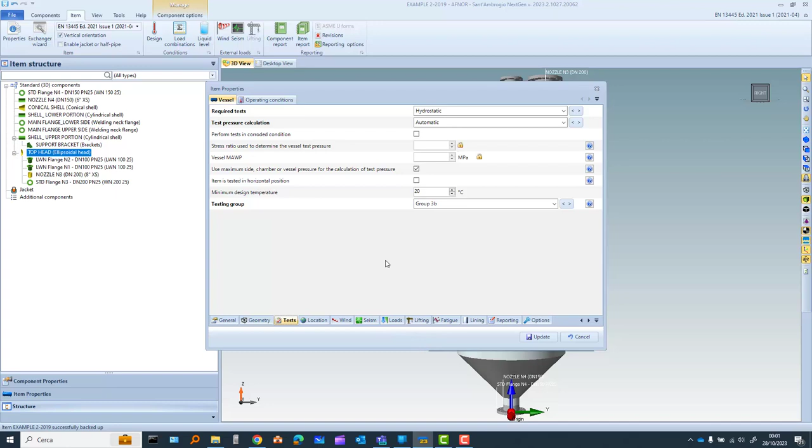Location, wind, seism, loads, lifting, not interesting in our case, but fatigue, of course, is interesting. Number of load conditions: there is only one condition of fluctuation, which is, by the way, pressure-only fluctuation. The pressure range is 17.5 bar, 1.75 megapascal. Why? Because the design pressure, we will see this in operating condition, is 20 bar. Of course, the fluctuation cannot be from 0 to the design pressure, it will be from 0 to the operating pressure.

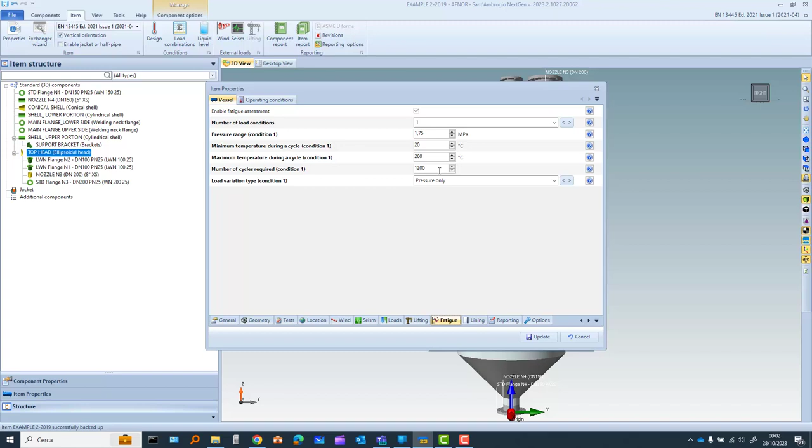Minimum and maximum temperature during the cycle are 20 and 260 degrees. Required number of cycles is 1200. Lining, reporting option, not interesting. Look at the operating conditions.

Design temperature 260, internal pressure 20 bar, we have no external pressure in our case, joint efficiency 0.85, there is no external corrosion allowance, there is only an internal corrosion allowance of 1 millimeter. There is no weld overlay, no cladding, and the class, according to the table contained in part 5, is class 3B.

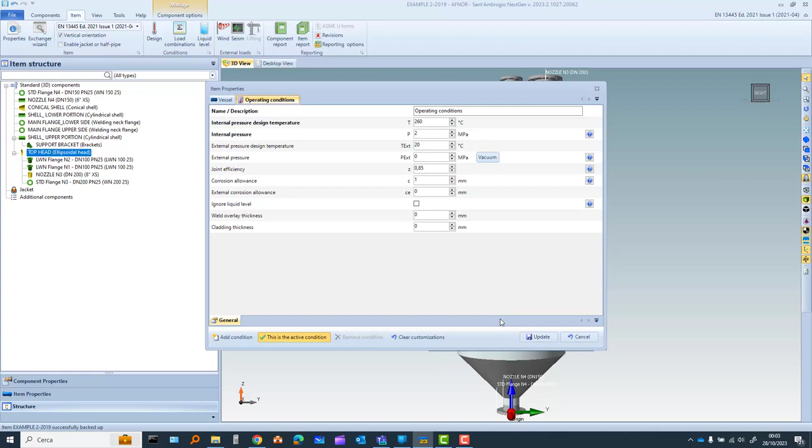Then we close this and we start looking at the various components of this vessel. Let's start with the upper end. The upper end is an elliptical end. The material is carbon steel P355GH EN 10028-2. There is an under tolerance of 1.4 millimeter, which is due to the forming process. The thickness is 14 millimeter. The inside diameter is 1100. The head ratio is 2 to 1, so this is a classical elliptical end.

Under general, what is interesting here is the external diameter multiplier to calculate the head blank diameter before forming. This is important for the calculation of the elongation. The entire vessel belongs to group 3B, as I explained. Let's look at the preliminary report. The minimum required thickness for internal pressure is 9.6. The reason a greater thickness, 14 mm, has been used is because we have to provide adequate reinforcement for the nozzles at the top.

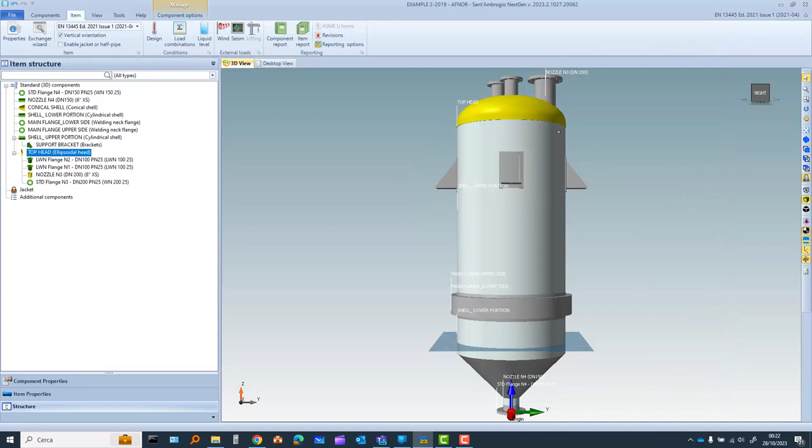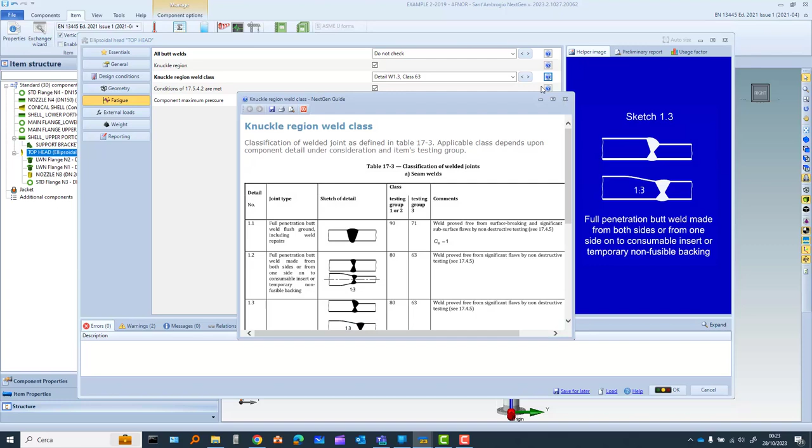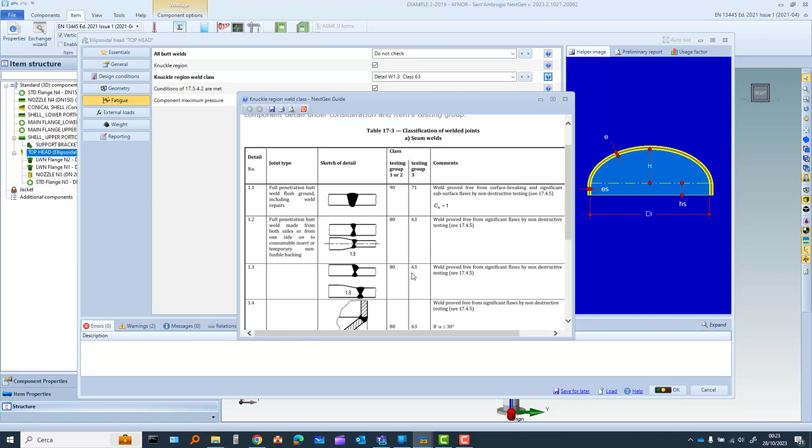Before closing this, let's look also at the problem of fatigue, because this is the most important thing. Butt welds do not check, because there is no governing weld. This is made of one piece only. Knuckle region weld class, this is important. Let's look at this table of the standard. What is applicable here, in the knuckle region, is the weld with the first shell. This is a weld between two different thicknesses. Therefore, for testing group 3, the class is 63. In fact, we have written class 63. Conditions of 17.5.4.2 are met.

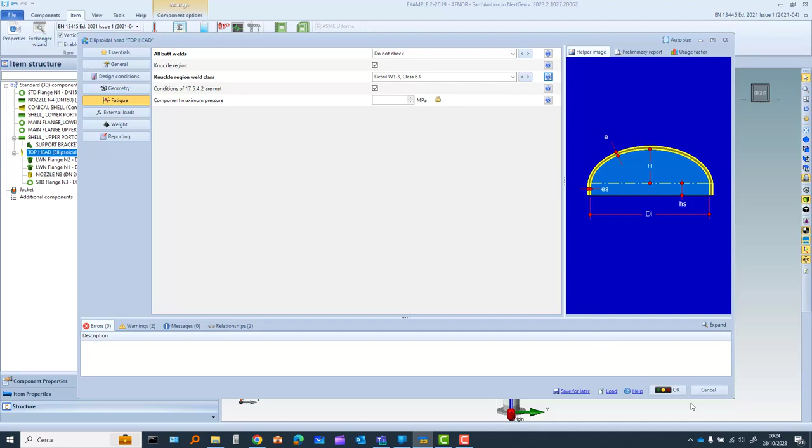What are these conditions? These are the conditions for the calculation of a minimum number of cycles for fatigue greater than 500. This is not important in our case. It could be important if the purpose of this calculation was to see if a calculation for fatigue is applicable or not. But we have started exactly from the idea that we must make this kind of calculation. Then we go to the cylindrical part. The cylindrical part is also made of P355GH.

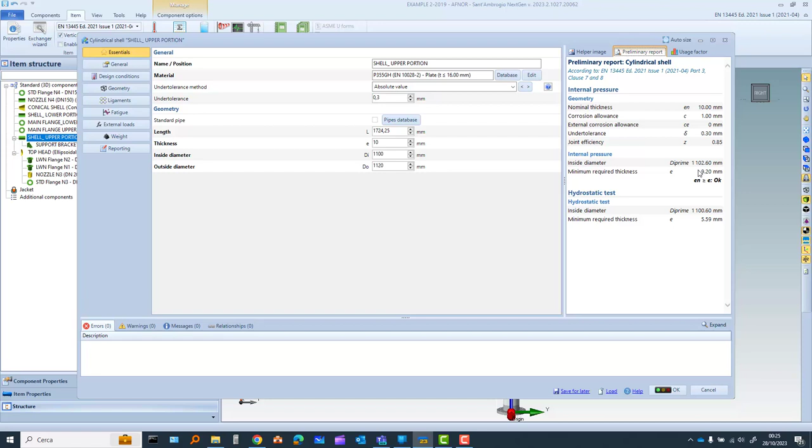The under tolerance method is absolute value, 0.3 millimeter, which is the normal tolerance for this kind of material. This is the length, this is the thickness, 10 millimeter, this is the diameter. Well, of course, we must give a look to the preliminary report. The preliminary report tells us that the minimum thickness for the internal pressure is 9.2 millimeter, so 10 is the correct thickness.

For fatigue, we have to see longitudinal butt weld, general case with combined imperfections. The problem of any weld is the fact that there are imperfections. In the case of a longitudinal weld of a cylinder, the imperfections are of three different types: the offset, the overlay, the ovality, and the peaking. The offset is given by this table, offset of middle lines for longitudinal welds in cylinders.

The cylinder is between 4 and 10 because it's 10, so we have decided to give the maximum allowable values according to the standard. We have 1 millimeter. The ovality, we close this and we look at the ovality. The ovality, the out of roundness, shall be calculated in accordance with the following. It shall not exceed the following values:

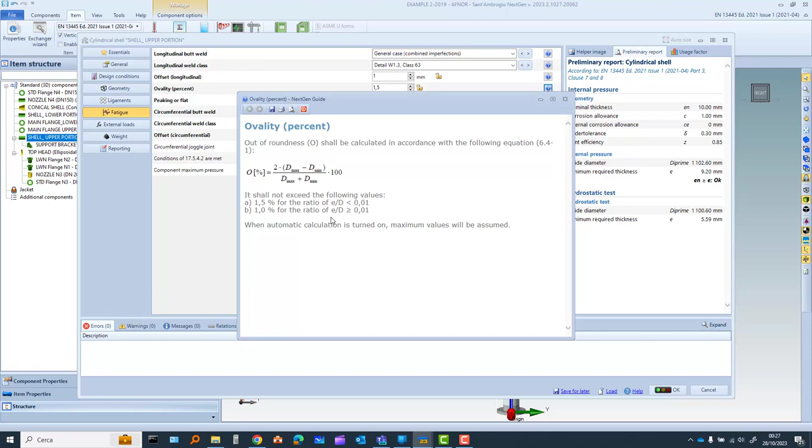1.5% if the ratio thickness over diameter is smaller than 0.01. Otherwise, it's 1%. In our case, the diameter was 1100, the thickness is 10. It is certainly smaller than 0.01.

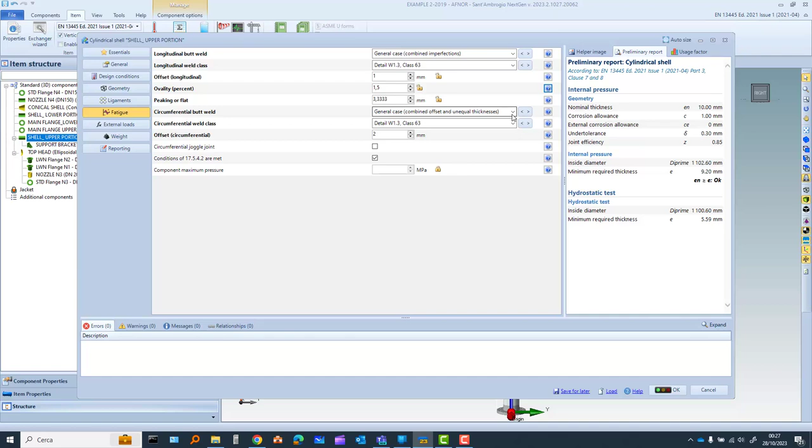Other problem is the peaking. What is the peaking? The peaking is the distance between the top part of the weld and the ideal circle. So any longitudinal weld will cause a small distortion of the edges of the adjoining plates. The maximum allowable peaking for thicknesses greater than 9 millimeter is the lesser of the thickness divided by 3 or 10. Thickness divided by 3 is 3.33. So we have used the maximum possible defects.

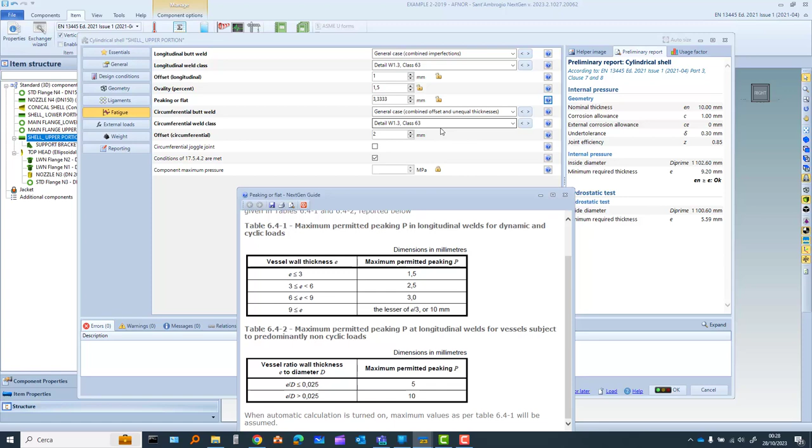Then we have to look at the circumferential butt weld. General case, combined offset and unequal thicknesses, because of course it is connected to other components with different thicknesses. So what is applicable is the same detail that we have already seen for the class 63.

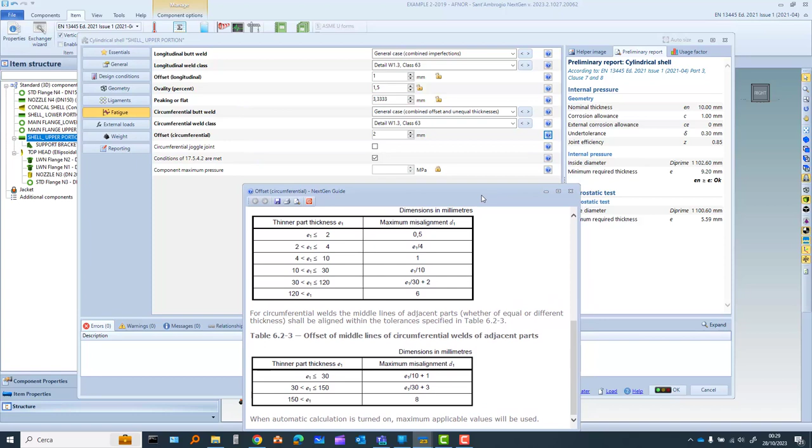Offset circumferential. In the case of circumferential weld, the allowable offset is different. For thicknesses smaller than 30 millimeter, it's 1/10 of the thickness plus 1. 1/10 of the thickness is 1, plus 1 is 2. There are no circumferential joggle joints. Okay, we close this and we go to the next component.

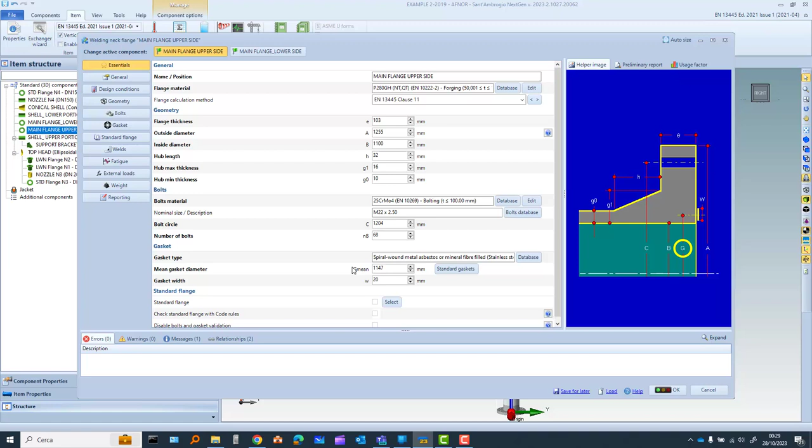Next component is a flange. A flange, well, you have all the data. This is made also of a carbon steel material. Of course, the carbon steel material is the one which is suitable for forgings. Calculation is made according to clause 11 of EN 13445-3. These are all the dimensions. These are the bolts and everything. Let's go directly to see the problem of fatigue.

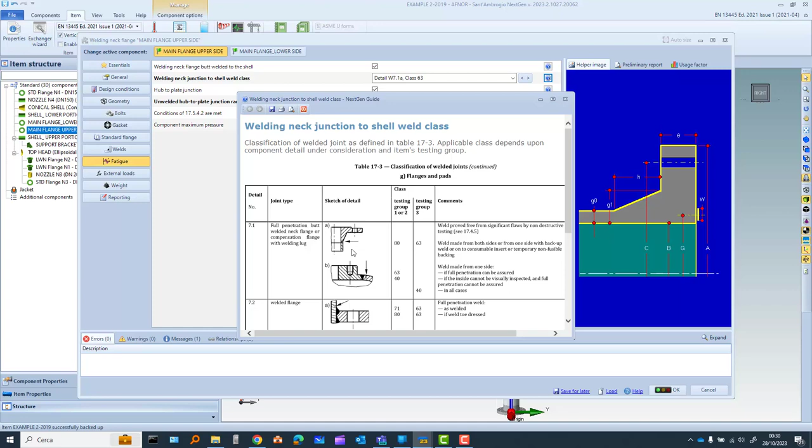Welding neck junction to shell, weld class. This is a circumferential weld. The detail is W7.1a. We are in this condition. Class 63 because the testing group is 3. Then unwelded hub to plate junction radius is this radius, the radius between the plate and the hub. We suppose that the junction is 13 millimeter.

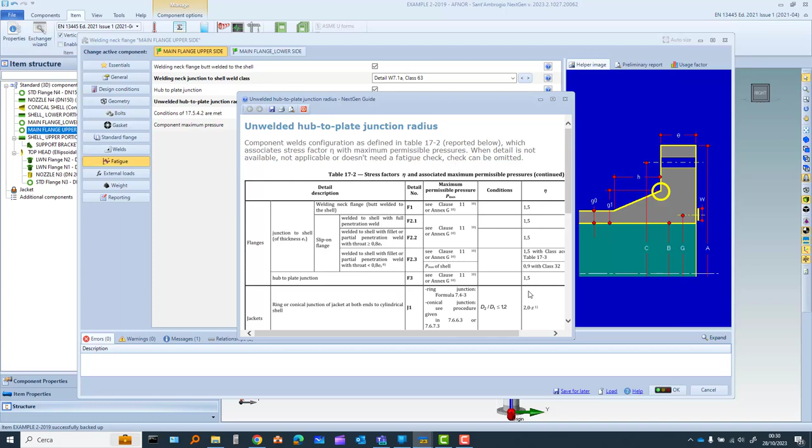Of course, in this case, what is important is to check what is the eta value. You have already seen in the lesson what is the eta value. Okay, well, we don't lose time for this flange because it's exactly equal to the other one.

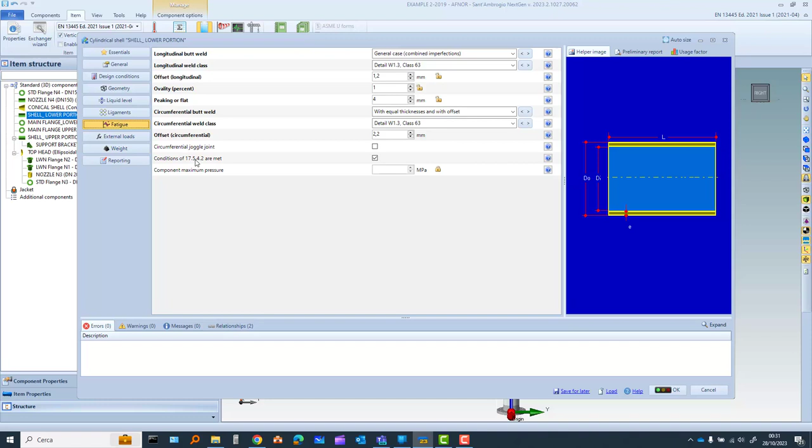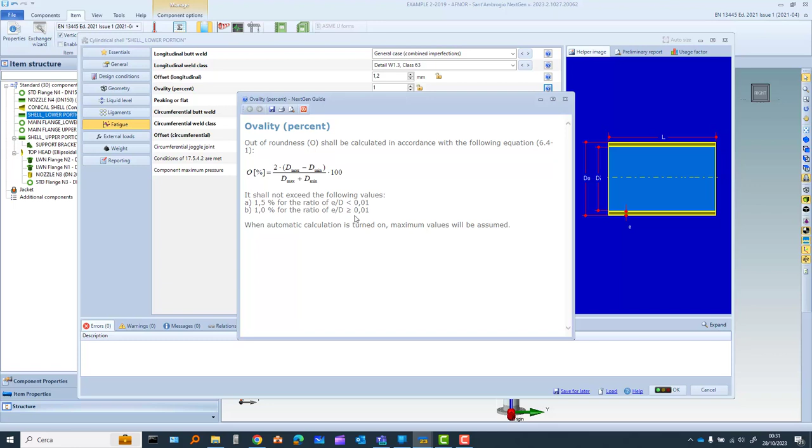The lower shell has a greater thickness, in fact. It's a thickness of 12 millimeter because this shell has the problem of the reinforcement with the connection to the cone. When we go to the fatigue, there is some modification in respect of the other shell. Offset longitudinal is 1.2. The ovality this time is 1 because this ratio has been exceeded. So we are now in this condition, thickness over diameter greater than 0.01.

Offset circumferential is 2.2. Okay, because, if you remember, we have this table, so the circumferential offset, thickness divided by 10 plus 1, so 1.2 plus 1, it's 2.2.

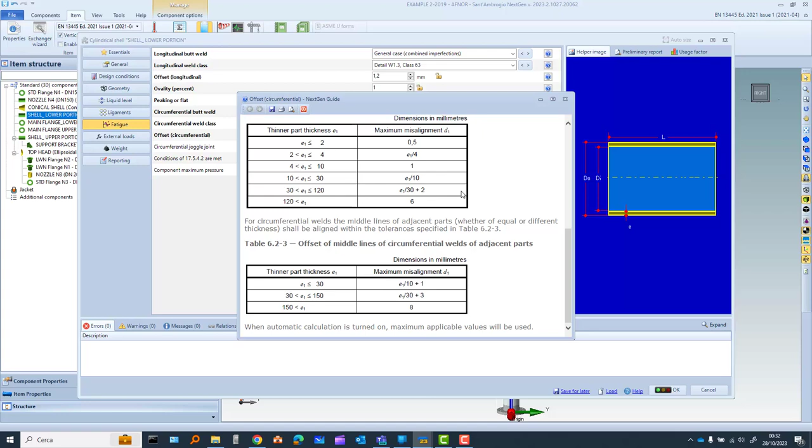And then we accept this, we go to the cone. The cone has a thickness of 12 millimeter, like the adjoining shell. Preliminary report says that it is adequately calculated because the minimum thickness is 11.59. For fatigue, we see that the situation is the same as the adjoining shell, more or less, because the thickness

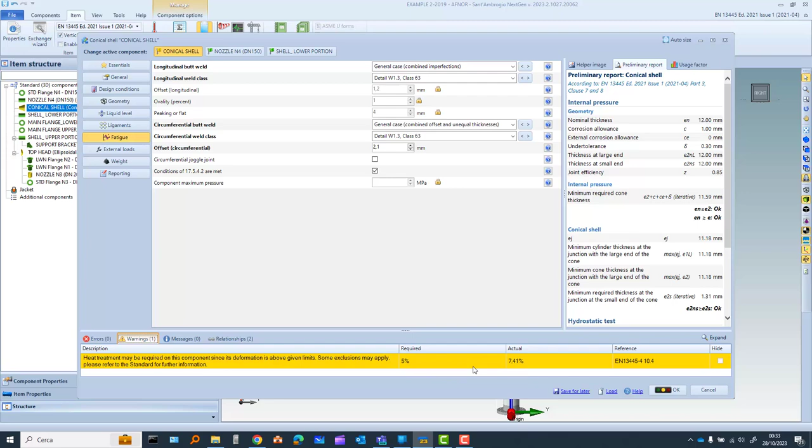is the same. There is a yellow warning also in this case. The yellow warning is concerning the elongation, which is greater than 5%. This cone must be subject to a heat treatment too.

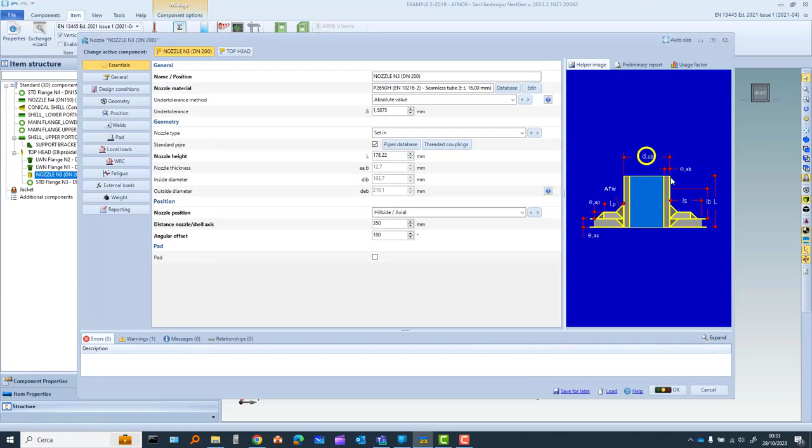Okay. Well, we don't lose time to look at the small parts, but maybe if we look at this part, this is important because it's a nozzle which has been welded exactly in the knuckle of the upper end. We have to clarify what is the problem of fatigue for this nozzle. Of course, there is no problem of calculation, longitudinal check, transverse check.

You know that in the case of nozzles welded to the knuckle portion of an ellipsoidal or torispherical end, the reinforcement calculation simply consists in increasing the end thickness, which has been already made, because if you remember, the minimum thickness was lower than 10, but we have used a 14 millimeter.

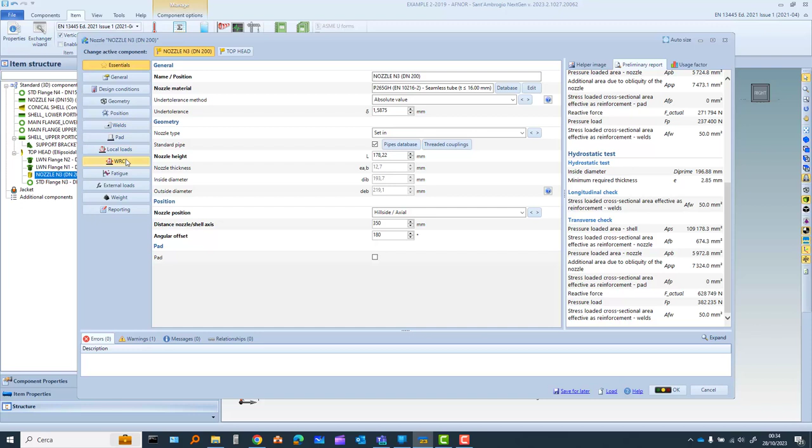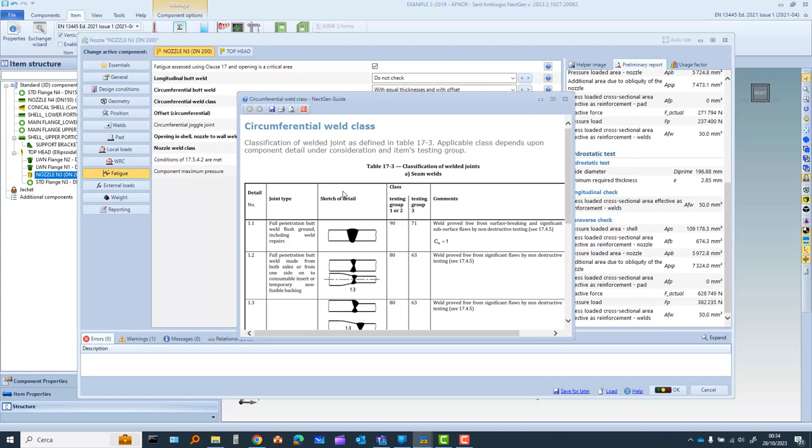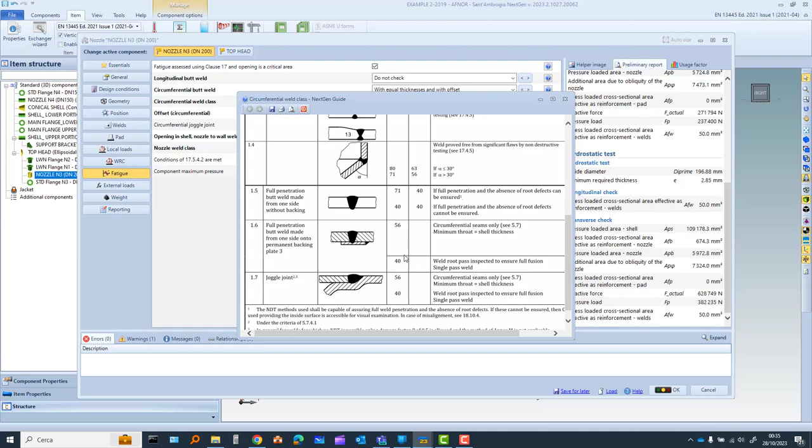In the case of fatigue for this nozzle, there is no longitudinal butt weld, so do not check. Circumferential butt weld with equal thicknesses and with offset. Circumferential weld class, detail W1.6. Let's look at this detail. 1.6. Well, circumferential seams only, minimum throat equal to shell thickness. The weld root pass inspected, so there is no supporting plate, but there is a weld root pass inspected to ensure full fusion and a single pass weld. So the class is lower. In this case, we have a class 40.

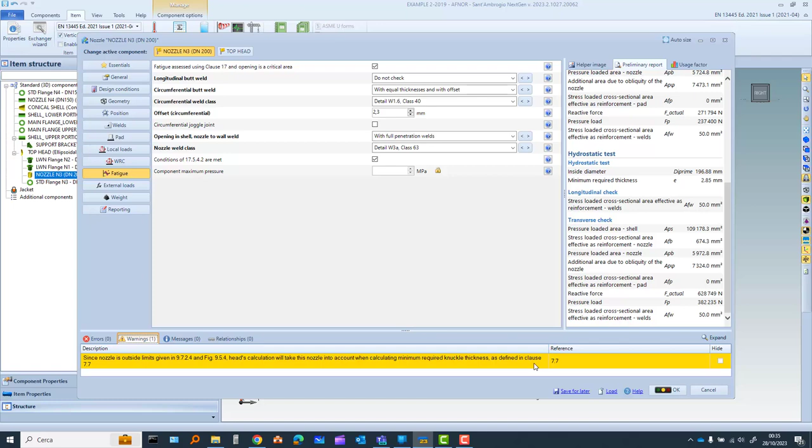Other things, there is a warning too. Since nozzle is outside the limit, the head's calculation will take this nozzle into account when calculating minimum required knuckle thickness as defined in clause 7.7. Okay. Now we can give a look to the item report. Everything is okay except for some yellow warnings that we have already seen. Then we'll look at the report.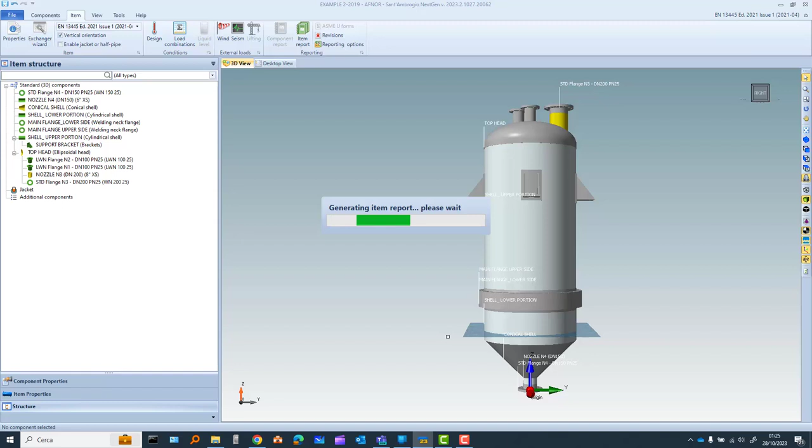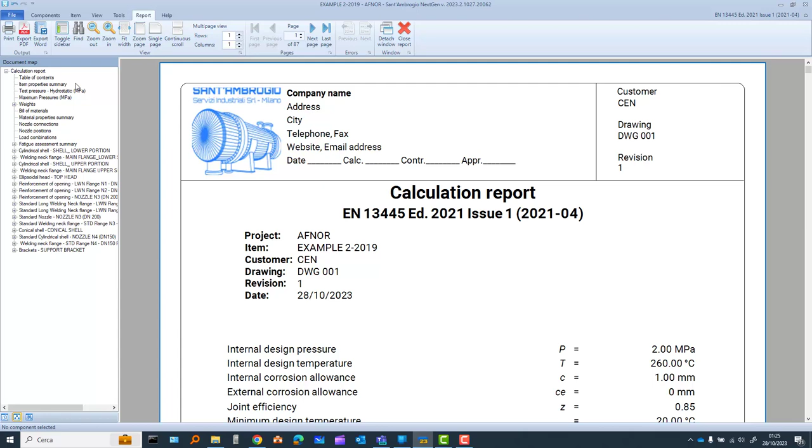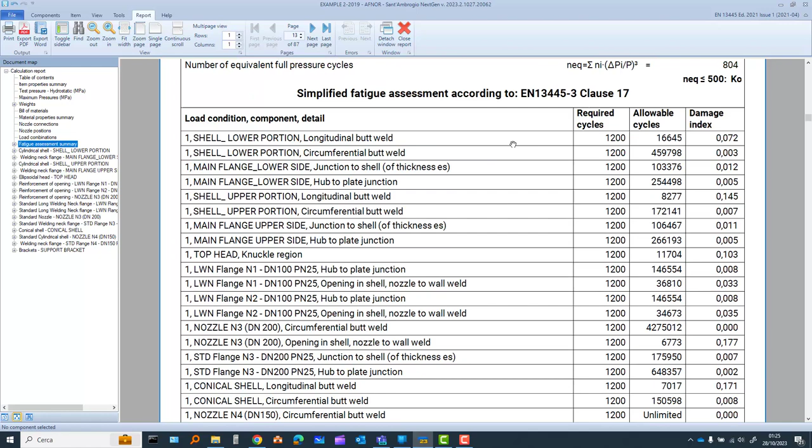Okay, now we zoom it a little bit in order to see it better. You see there is a table of content, there is an item property summary, but let's look at once what is interesting. Fatigue assessment summary. Here we have component by component, the allowable number of cycles, and we see that the limit is given by 6,773 in load condition. There is only one load condition.

The nozzle N3, opening in the shell, nozzle to wall weld, so it's not in the shell, it's in the upper end. But this is exactly what we have seen, the nozzle N3, 6,773. The conclusion is that certainly the required number of cycles, 1200, is acceptable. But let's look a little bit better at this table.

Of course, we should expect that since the nozzle is welded in a critical region of the end, so the knuckle region, certainly there is a greater stress concentration than in other locations. But what is a little bit surprising is that also the longitudinal butt weld in the conical shell seems to have some problems. 7,000 cycles, almost the same number of cycles of this clear stress concentration. Why is there also a stress concentration in this weld? The reason is that we have considered all the maximum possible defects of this weld.

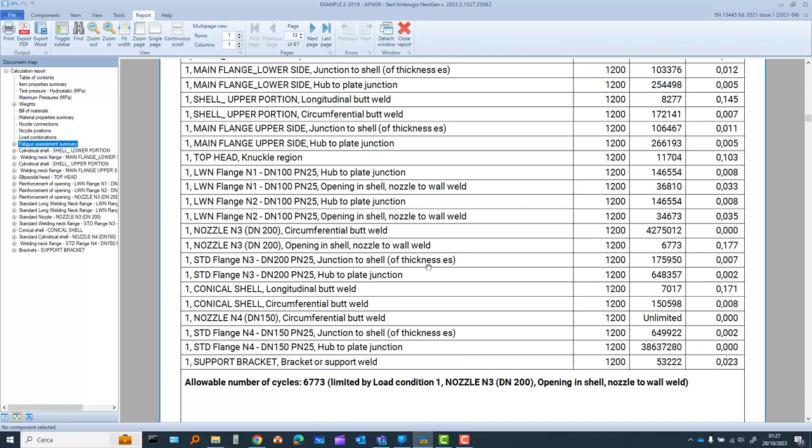Let's come back to this, the cone. So we close now the report and we look again at the cone. And we look for fatigue, the longitudinal butt weld in the cone. We have used the maximum possible defects of this weld. Defects are three types: maximum offset, maximum ovality, maximum peaking. Suppose that we take 50% of these defects.

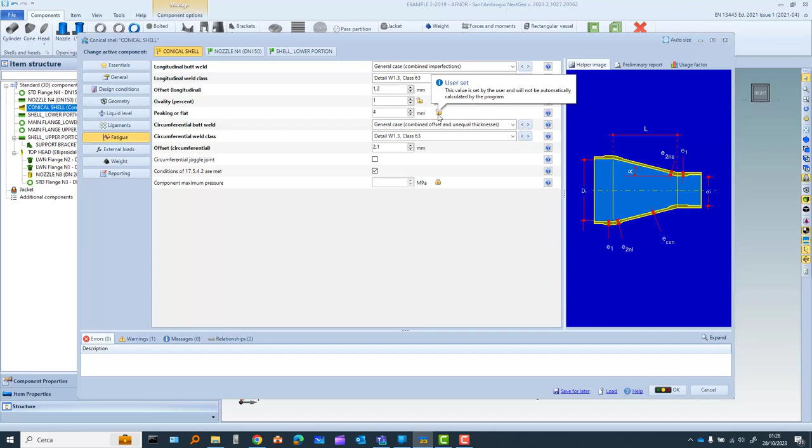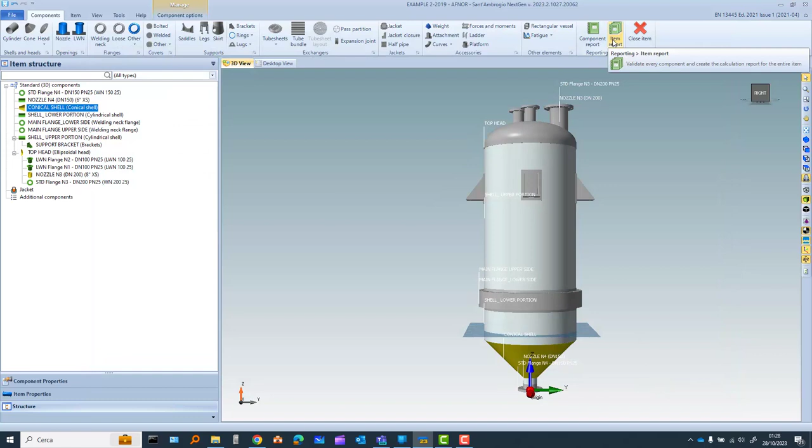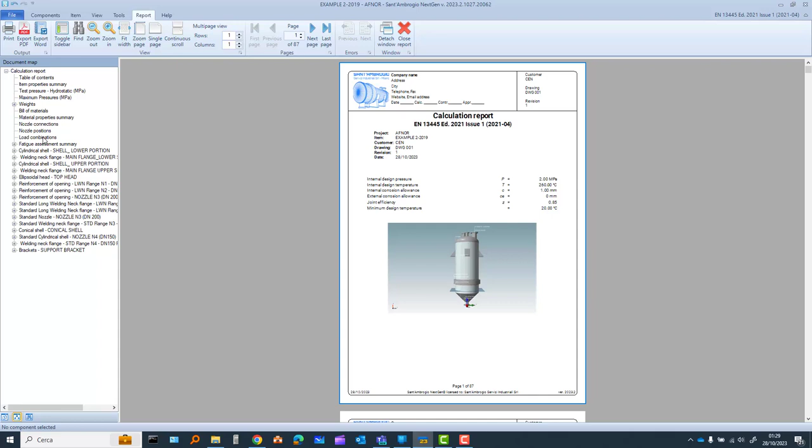Say instead we open the locker, and now instead of 1.2 we write 0.6. Instead of 1 we write 0.5. Instead of peaking we write 50% of the maximum peaking. Okay, we confirm. We look at the item report again. Report. And then we go to the fatigue assessment summary. We make it a little bit bigger.

And we look now at the cone, conical shell, longitudinal butt weld. Instead of having 7,000 and something, we have 25,000 and something. Well, that is a problem. So, of course, if we make a design, we must take into account the maximum possible capacity of our shop. The maximum possible capacity of our shop, if we do not make any special agreement with the shop, is in any case the maximum possible defects permitted by the standard.

Of course, you might impose to your shop defects smaller than the maximum possible defects of the standard, but this will become a difficult situation in the relationships between the technical department and the shop. In many cases, it's a normal situation of all the pressure vessel manufacturers.